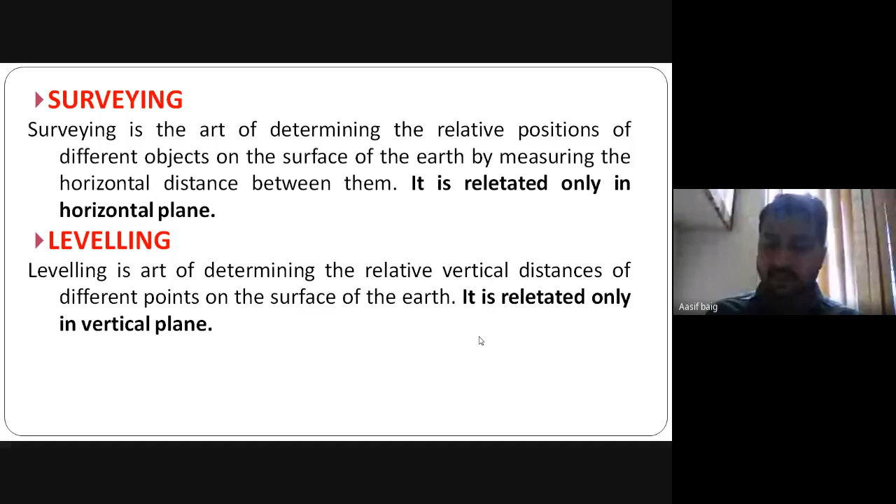Surveying deals with the horizontal plane. In that case, we deal with the determination of horizontal distance only. But in case of leveling, we deal with the vertical plane, in which we determine the relative position in case of height. So these are the definitions of surveying, and another definition is leveling.

So what are the objectives of surveying? The main objective of surveying is to prepare a map or plan to show the relative position of the objects on the surface of the earth, to determine the boundaries of land, and it is very useful for the purpose of designing projects such as dams, canals, roads, railways. The successful completion of any engineering project mainly depends upon accurate surveying.

So surveying is the basic method, or we can say the main branch of civil engineering, which deals directly with all types of structure construction. While going for any road or railway construction, or canal construction, you must have correct alignment, which may lead to an economical project.

While constructing a building, you must go with its boundary line. So for determining the boundary of land, surveying is required. For drawing any type of map or plan, surveying is required. So surveying is the basic thing required in the civil engineering field. This is the main branch of civil engineering.

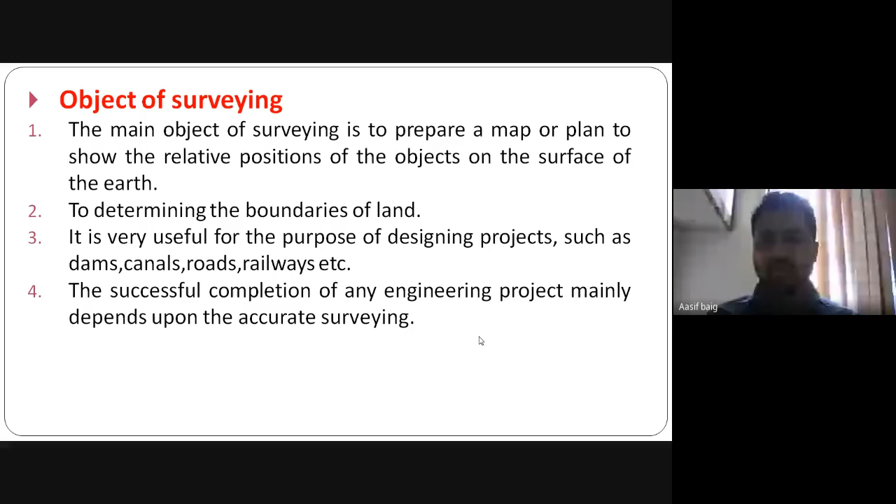Now, what are the uses of surveying? It is useful for measurement of areas, to prepare different types of maps, such as topographical map, cadastral map, engineering map, military map, contour map, geological map, etc. So what are these types of maps? Topographical map is the map which gives the idea regarding the land.

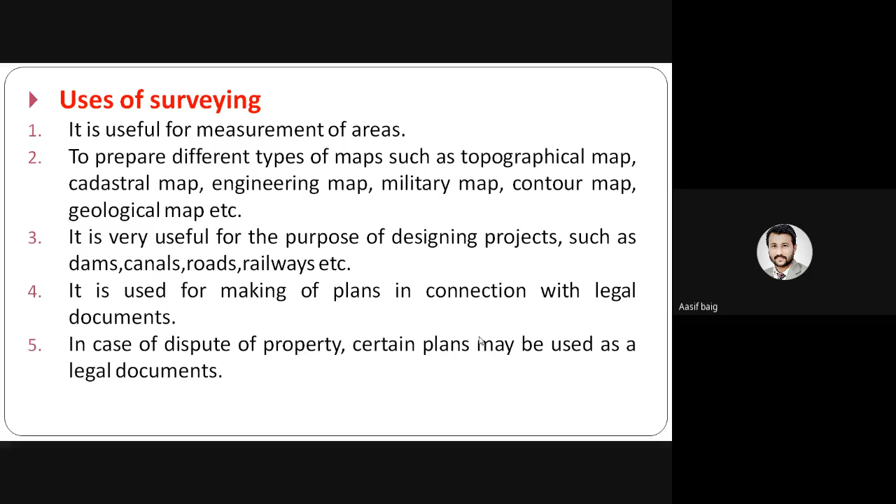Now, depending upon other things, these maps are classified like cadastral, engineering map, military map, contour map, and geological map. It is very useful for the purpose of designing projects such as dams, canals, roads, railway. It is used for making plans in connection with legal documents, and in case of dispute of property, certain plans may be used as a legal document.

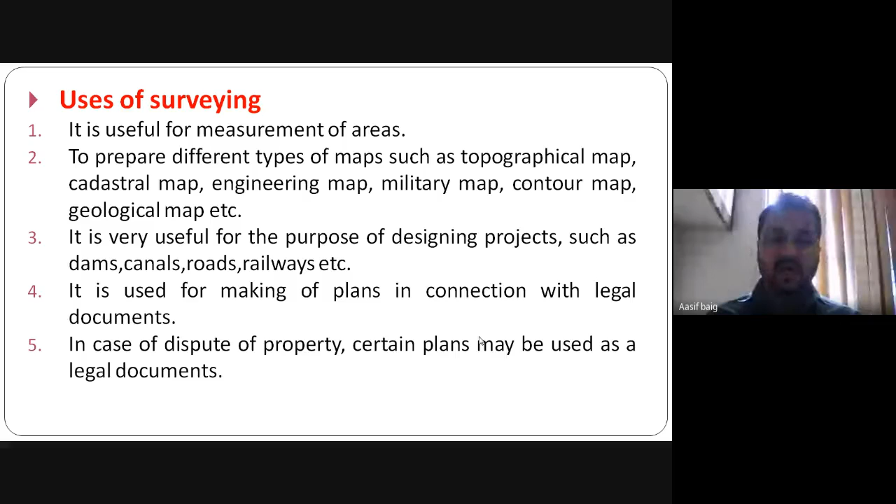So surveying is used in this field. Other than this, many fields are there, as surveying is the main branch of civil engineering. Now, what are the principles of surveying?

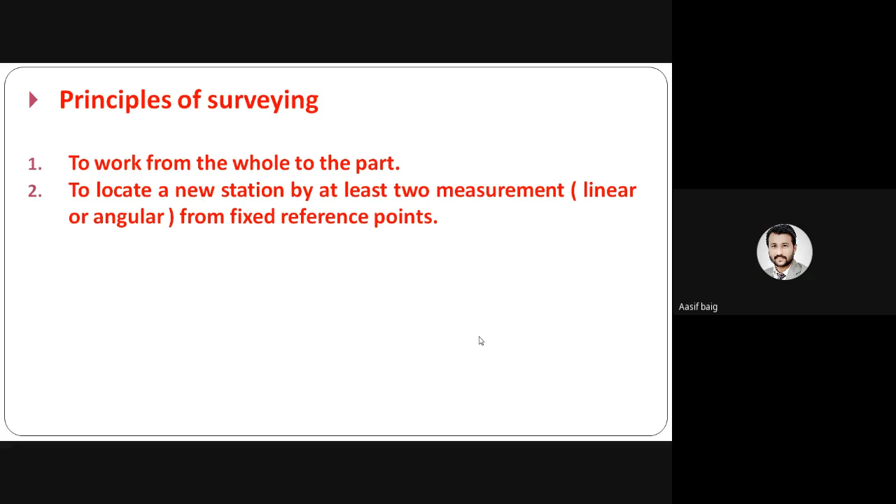There are two main principles of surveying. One is to work from whole to the part, and the other is to locate the new station by at least two measurements, linear or angular, from a fixed reference point. We will see one by one what is meant by work from whole to the part, and to locate the new station by at least two measurements, which may be linear or angular.

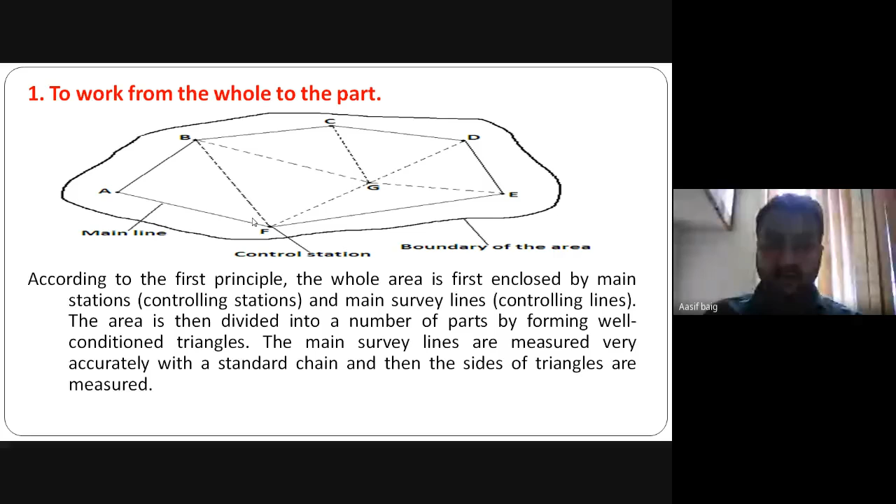Then main survey lines, that is the controlling lines, are the main survey lines. The area is then divided into a number of parts by forming well conditioned triangles. The main survey lines are measured very accurately with a standard chain, and then the sides of the triangle are measured. So the whole area is divided into main station lines, then divided into well conditioned triangles, and these lines are measured with the help of a chain. This is the first principle of surveying.

Another point on the same topic: the purpose of this process is to prevent accumulation of error. During this procedure, if there is any error in the measurement of any side of a triangle, it will not affect the whole work. The error can always be detected and eliminated. But if the reverse process, from the part to the whole, is followed, then the minor error in measurement will be magnified in the process of expansion, and this error will become absolutely uncontrollable.

So the purpose of this first principle is to avoid accumulation of error. While measuring any area or boundary, we have to divide the whole area into parts, and measure each individual part. So if there is any error in any part, the whole work will not be affected by that error. We can account for that error afterwards.

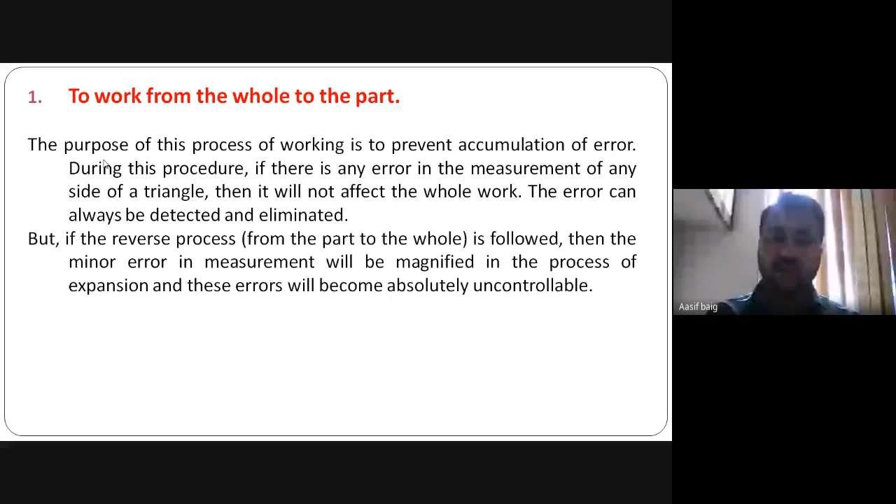Now the second principle is to locate a new station by at least two measurements, which may be linear or angular, from a fixed or reference point. According to this second principle, the new station should always be fixed by at least two measurements from a fixed reference point. Linear measurement refers to horizontal distance measurement by chain or tape. Angular measurement refers to a magnetic bearing or horizontal angle taken by the prismatic compass or the theodolite.

So these are the equipment used to determine angle and distance. For distance we can use a chain or tape, and for angular measurement we can use the prismatic compass or the theodolite.

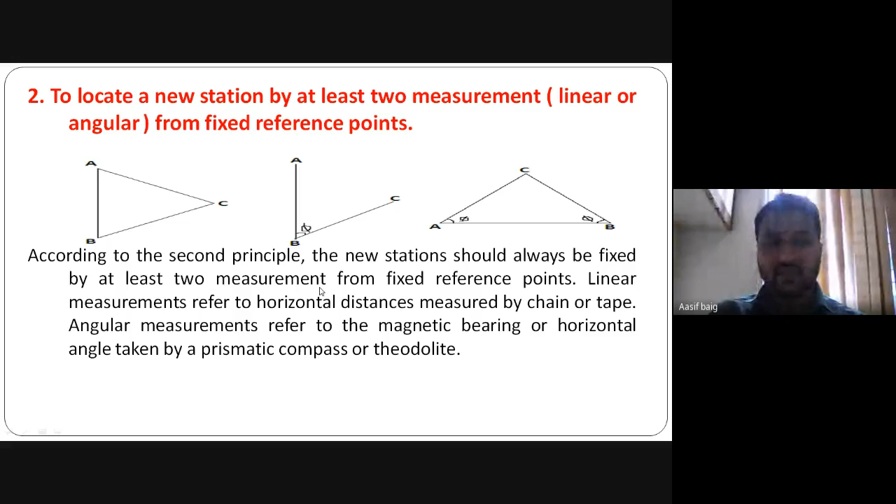So at least two measurements we should know: the length between particular stations, and the angle. It may be either linear or angular. In the first diagram, this is purely linear. In the second diagram, it is one linear and one angular. In the third, both are angular.

Now the classification of surveying. The first is primary survey, and the second is secondary survey. Surveying is classified into two: primary and secondary. Primary survey has two types: plane surveying and geodetic survey. In plane surveying, we are not considering the spherical shape or curvature of the earth.

But in geodetic surveying, we are considering the curvature of the earth, as we know the earth has a spherical shape, so this survey is called geodetic survey. The second classification of surveying is the secondary classification, which is further classified based on its uses.

Based on the instrument used, surveying is classified as chain surveying, compass surveying, plane table surveying, theodolite surveying, tacheometric surveying, and photographic surveying. If you are using the chain, it is chain surveying. If you are using the compass, it is compass surveying. If you are using the plane table, it is plane table surveying. If you are using the theodolite, it is theodolite surveying.

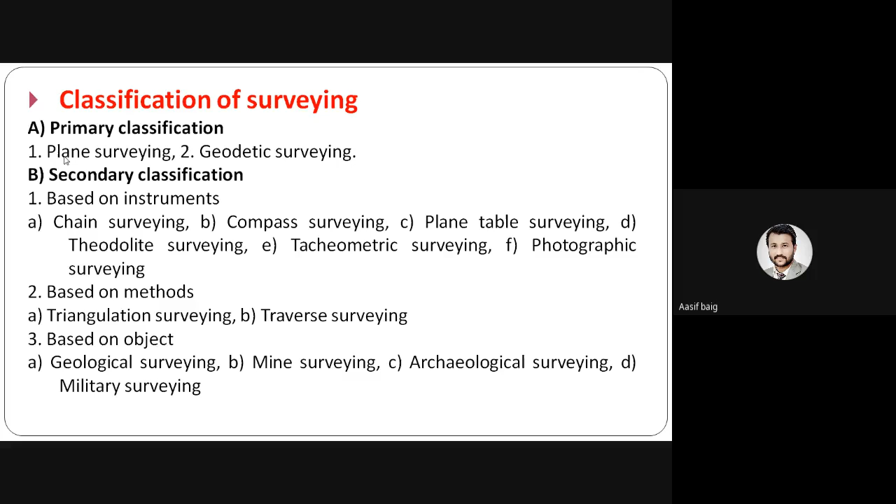Now based on the method, this is classified into two: triangulation surveying and traversing. What is meant by triangulation and traversing, we will see in the next class. But on the basis of this method, surveying is classified.

Now based on the object, surveying is classified into geological surveying, mine surveying, archaeological surveying, and military surveying.

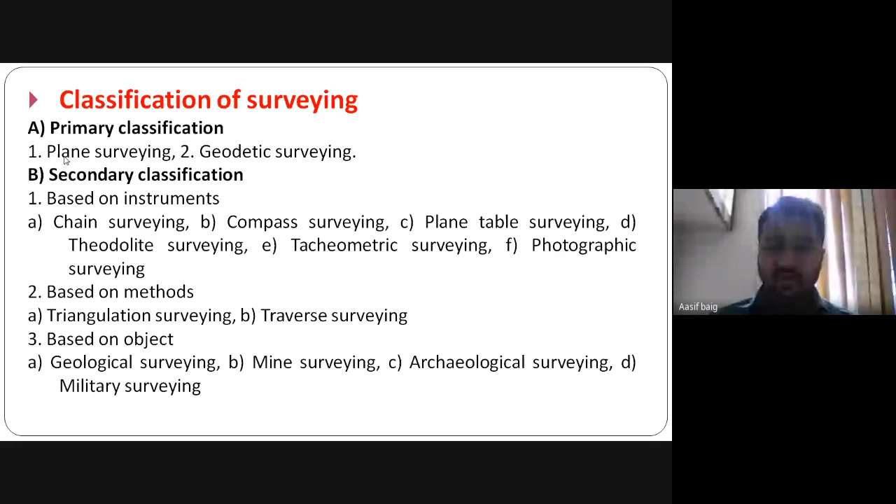Now again, based on the nature of the field: land surveying, marine surveying, and astronomical surveying. If the survey is performed on land, it is land surveying. If the survey is performed on water, this is marine surveying. If we are talking about the stars, this is astronomical surveying.

Land surveying is divided into the following classes: topographical surveying, cadastral surveying, city surveying, and engineering surveying. What is meant by topographical surveying? To determine the natural and artificial features of the country, such as rivers, lakes, hills, roads, railways, towns, etc. This is called topographical survey.

Cadastral survey is to determine the boundaries of the field, estates, and houses. The city surveying is to locate the premises, street, water supply, and sanitary system. Engineering survey is to collect data for designing engineering works such as roads, reservoirs, railways, etc.

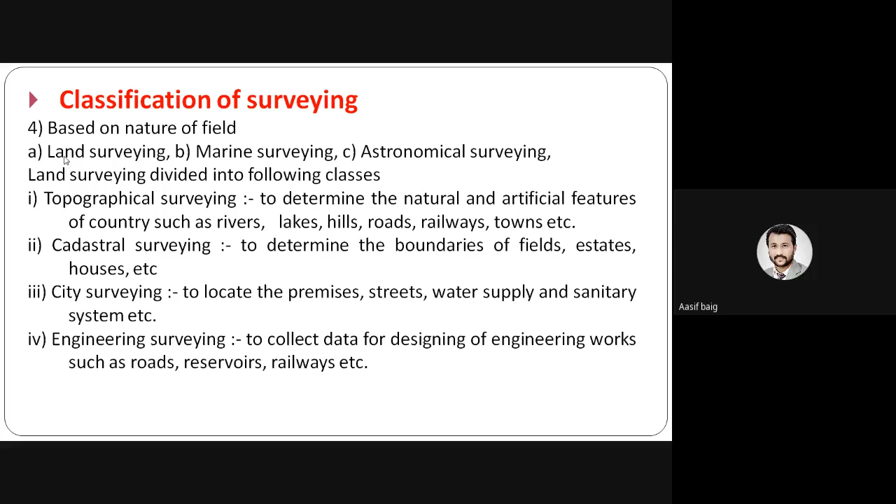Now, these are the differences between plane and geodetic survey. The effect of curvature of the earth is not considered in plane surveying, but in geodetic survey we have to consider the curvature of earth. The surface of the earth is taken as plane in case of plane survey. In geodetic survey, it involves spherical trigonometry, so it is called trigonometrical survey.

In plane surveying, the area to be surveyed is less than 250 kilometers square. So there is one limitation for plane surveying; we cannot go for more than 250 kilometers square area. But in geodetic survey, if you're surveying for more than 250 kilometers square, we have to consider the curvature of earth. The degree of accuracy is very low in plane surveying.

In geodetic surveying, accuracy is very high. The plane surveying is conducted by state agencies like Irrigation Department, Railway Department. Geodetic survey is conducted by the Survey of India, GTS department.

Now you can see in the figure below, the straight line is drawn in plane surveying. The undulation is drawn in geodetic survey. So curvature of earth is considered in geodetic survey.

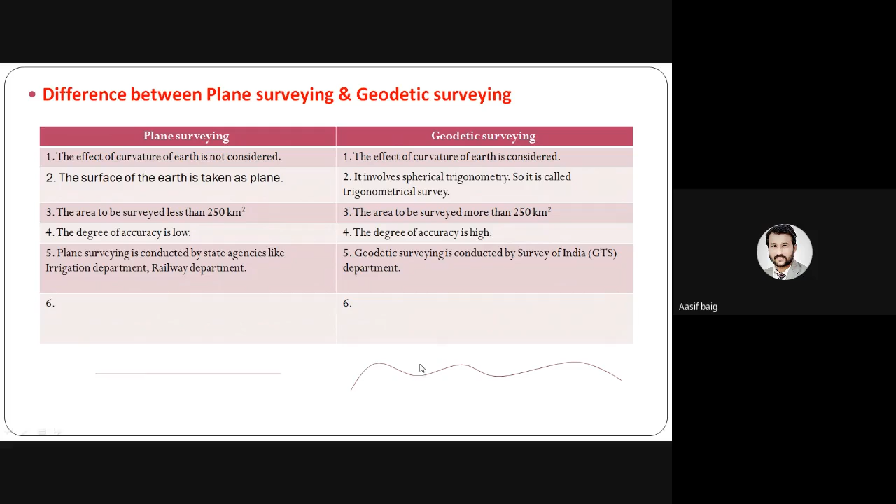Now, what is meant by representative fraction? It is the ratio of plan distance to the corresponding ground distance. Representative fraction is the ratio of plan distance, that is plane distance, to the corresponding ground distance.

In RF, both the numerator and the denominator should be in the same unit. If 10 meters on the ground represents 1 centimeter on the drawing paper, the scale is 1 centimeter equals 10 meters. So RF equals 1 centimeter divided by 10 into 100, which is 1 by 1000.

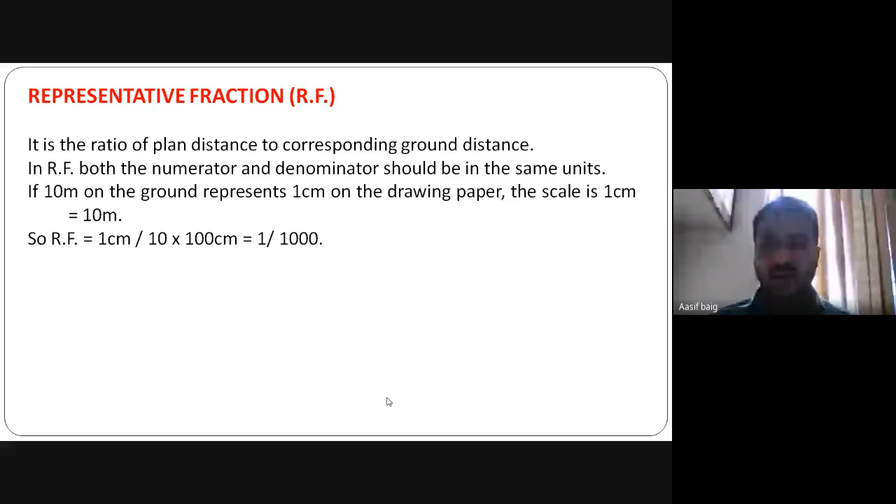This symbol is for the building. This symbol is for the temple or orchard. Cultivated land symbol is this one. This symbol is for the compound wall. This symbol is for the embankment filling.

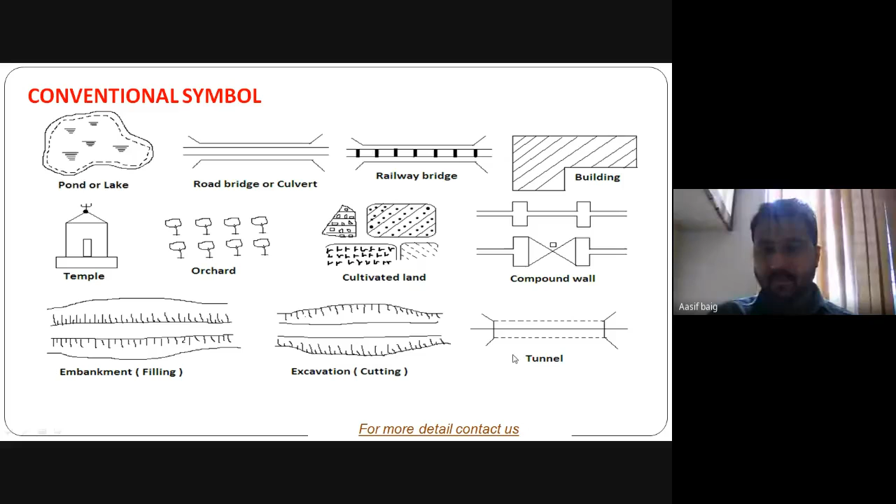This symbol is for the excavation cutting. This symbol is for the tunnel. So many more symbols are there.

So we will see the linear measurement. Linear measurement is one of the basic functions in survey. Always horizontal, not sloping distance, and there is no way to check the error other than remeasuring.

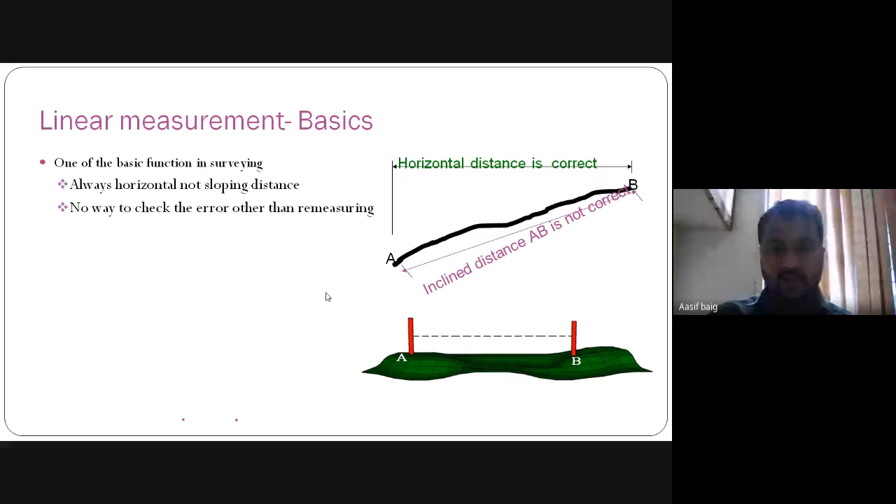So the inclined distance is not correct; horizontal distance is correct. If there is a slope and we are calculating the inclined distance, this is not correct. So from station A to B, if you are measuring the horizontal distance like this, this is the correct one.

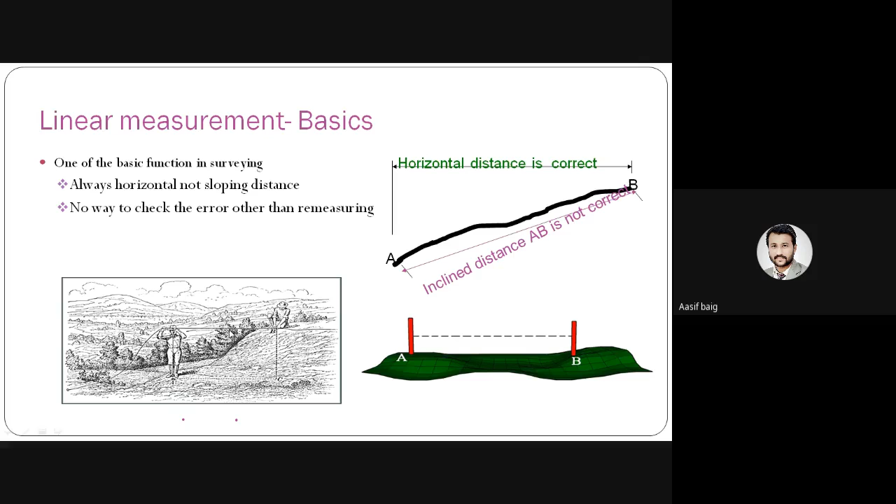So how we have to measure? You can see in the figure itself. So B point is there, and this is the A point. Okay, two men are there. So one person is holding the chain exactly horizontally. Okay, so this line is the correct one. Okay, so this is the horizontal measurement.

So linear measurement methods we will see. So there are methods of linear measurement: direct measurement, by optical means and electronic method. So from the figure of this instrument, you can see direct measurement by meter or by passometer or by tape or chain or by any digital meter. You can calculate the direct measurement.

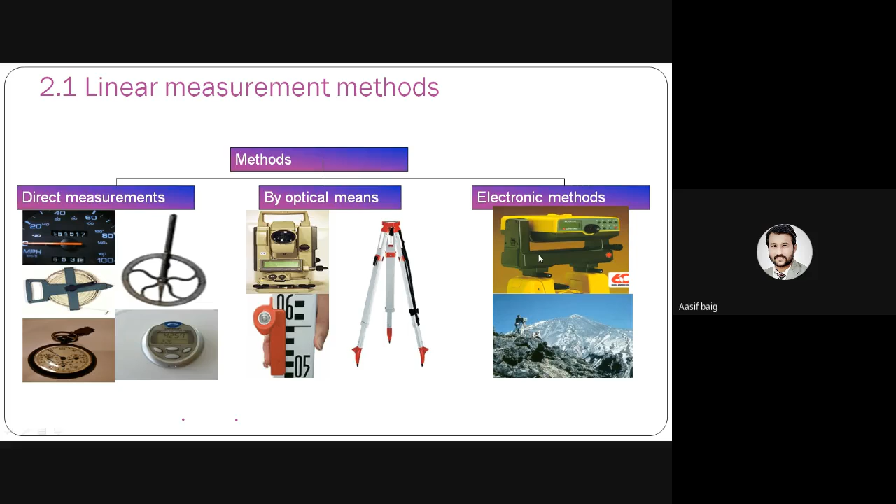By optical means, by using this total station, you can measure the distance. Okay, by electronic method. Okay, this is the instrument for measuring the distance. Okay, so this is called as the electronic distance meter. Okay, EDM. Now direct measurement instruments such as pacing, passometer, pedometer, odometer, or speedometer.

So rough method for preliminary survey, check of large mistakes in the measurement made by the more precise method. Unsuitable in irregular and sloping ground. Precision is 1 by 50 to 1 by 200. Okay. So in direct measurement, if the instrument used is pacing, passometer, pedometer, or odometer, which is also called as the speedometer, this is having some drawbacks.

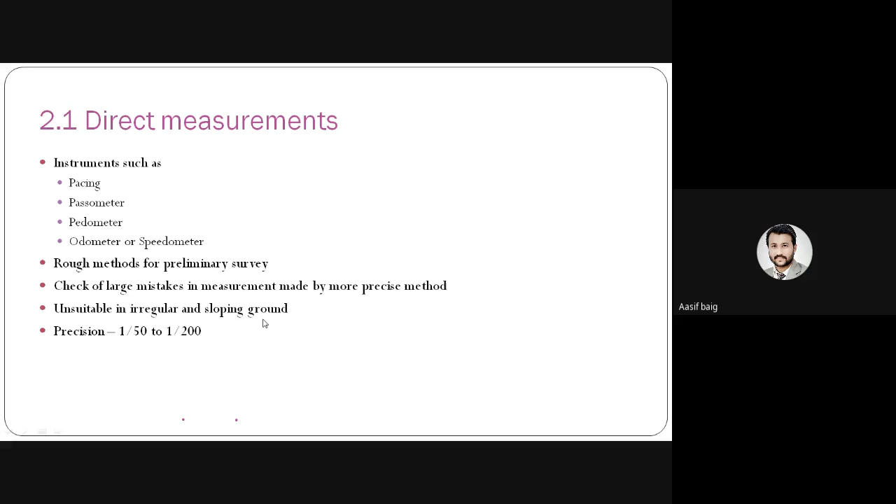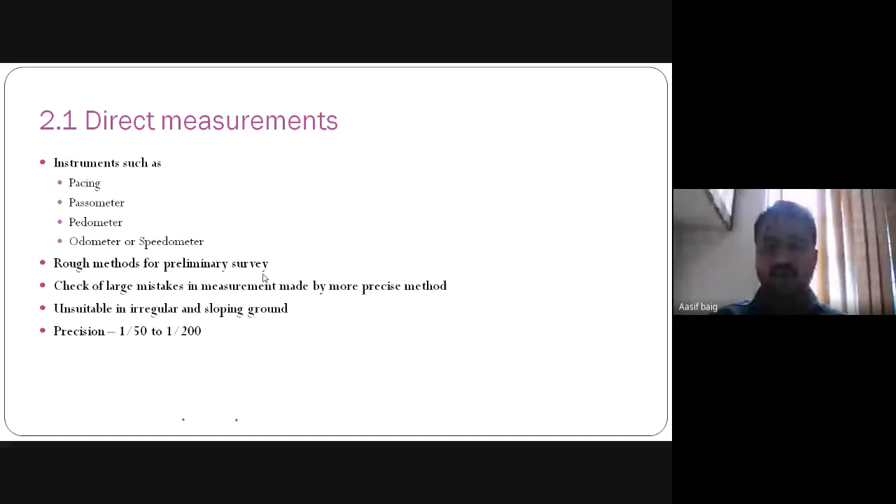This is used for the preliminary survey. This is for the rough. This is a very rough method. So rough survey we can perform by this instrument. Okay. So this is not a much precise method. This is not a much accurate method. So there are chances of error, and the precision of this is 1 by 50 to 1 by 200. Okay. So if you perform a 50 meter or 200-meter length measurement, there may be chances for 1 meter correction.

Okay. Now we will see the instrument like tape or chain, and the survey by using this instrument is called as chain surveying. Okay, so chaining or taping carries the same meaning. Use of either chain or tape for direct surveying, or the chain surveying. One of the accurate methods of direct measurement is the tape or the chain. The method is the basis for most surveying.

The precision of this surveying is 1 by 1000 to 1 by 5000 for ordinary land survey. Okay, so this is much more accurate than the pacing method or the pedometer or the speedometer method. Okay, so chain or tape is one of the accurate methods if you compare with the speedometer. Okay, so generally chain was used early on. Then the steel tape was used, and tape is very common nowadays. Okay.

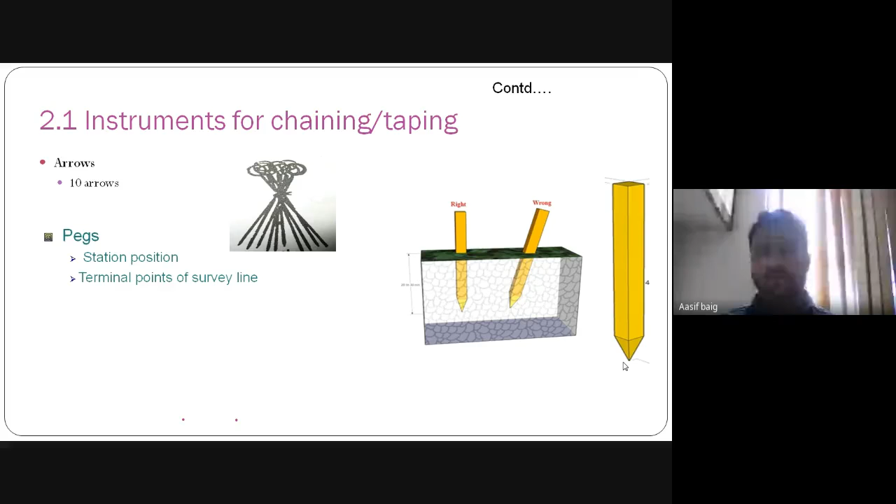Okay. And then we have to range that line by using the ranging rod, keeping the chain in a straight line on the line of that ranging, and at the end of the chain we have to insert the arrow. Okay, so the number of arrows multiplied by the length of a single chain gives you the distance between the stations A and B.

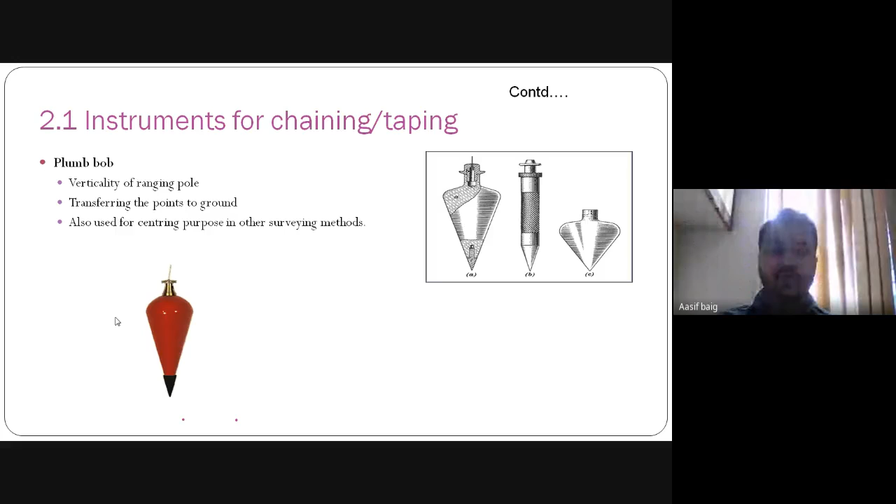Now another instrument is the plumb bob. This is used to check the verticality of the ranging pole and for transferring the point to the ground. Okay. Also it is used for centering purposes in other surveying methods, like if you are using the compass or the theodolite. So for centering purposes, this plumb bob is used. Okay.

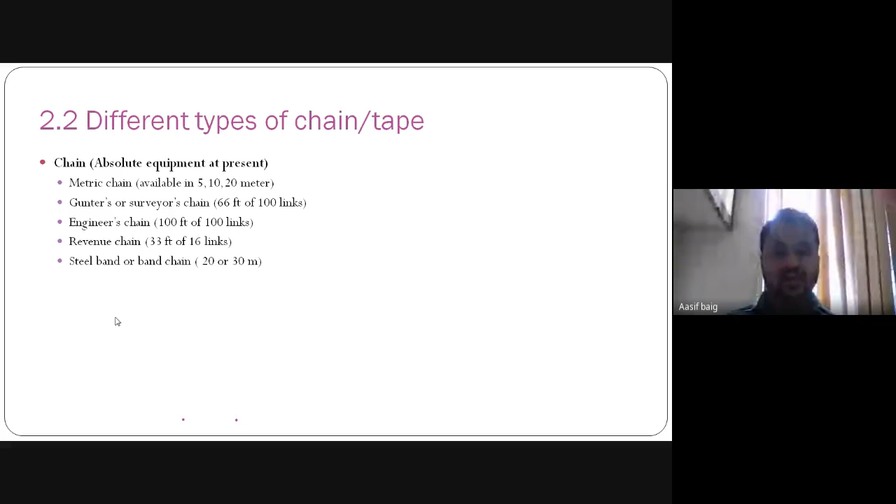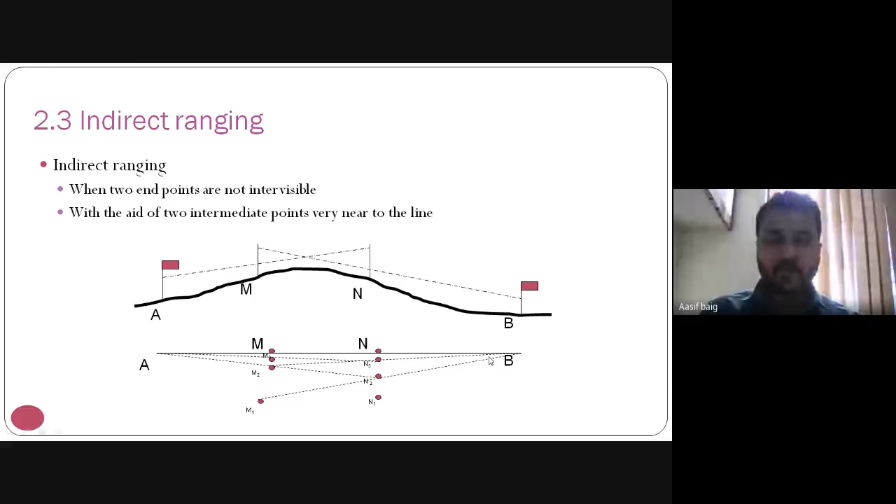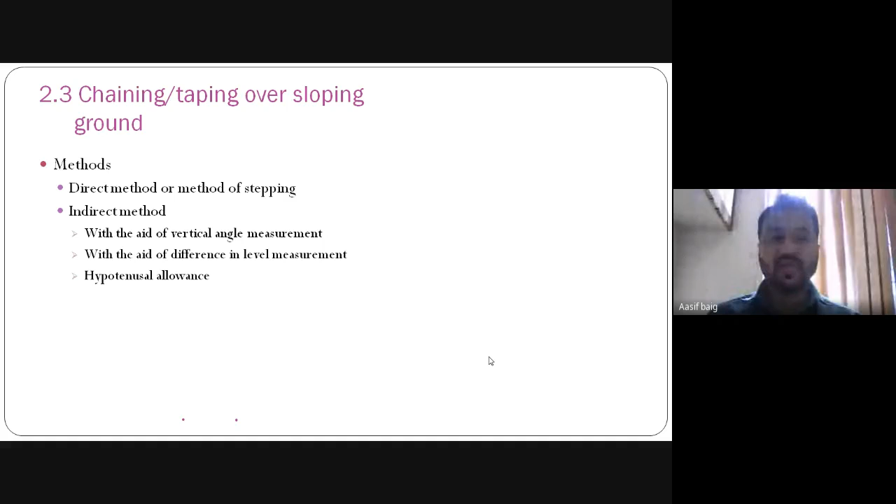Now, chaining or taping over the sloping ground. These are the methods: the direct method, which is also called the method of stepping. Another method is the indirect method. With the help of vertical angle measurement, difference in level measurement, or hypotenusal allowance, we can perform this indirect method.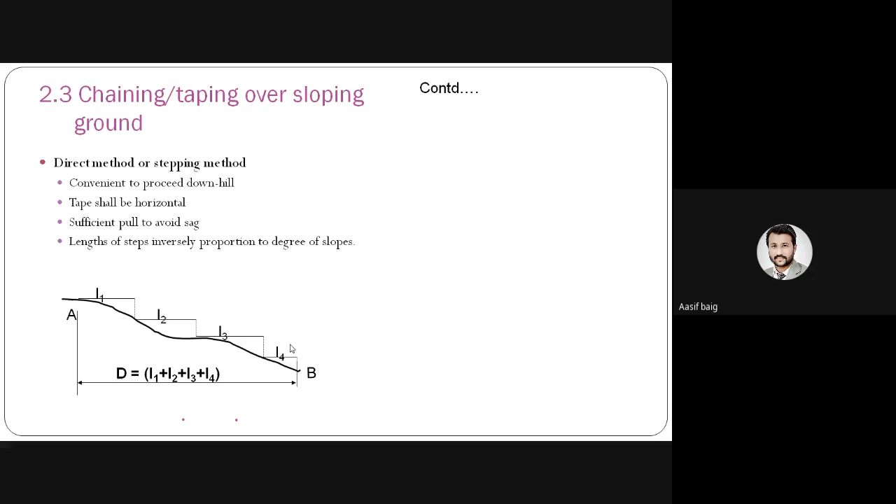Okay, we will drop the plumb bob again. Then from this point we will measure the distance L3. Then we will again drop the plumb bob and measure L4, and we will reach point B. We will add these horizontal distances L1, L2, L3 and L4 to get the total exact horizontal distance between A and B.

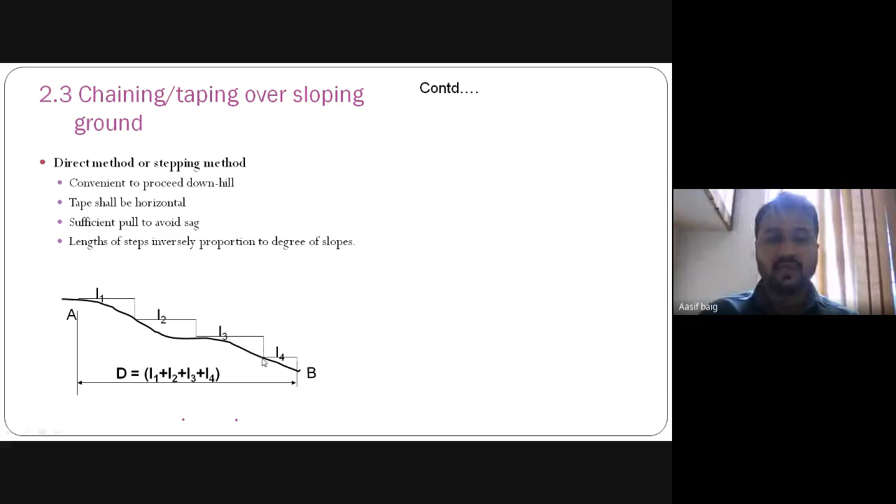And in the figure you can see this looks like steps. That's why this is called the stepping method. This is something we have seen in the first slide as well. Okay.

Now this is the indirect method: vertical angle measurement using a clinometer. A clinometer is the instrument used to measure the vertical angle. By measuring the vertical angle from A to B and B to C, we can determine the distances D1 and D2, and by summing up D1 and D2, we will get the distance from A to C. So by using trigonometric rules and the clinometer, we can determine the horizontal distance.

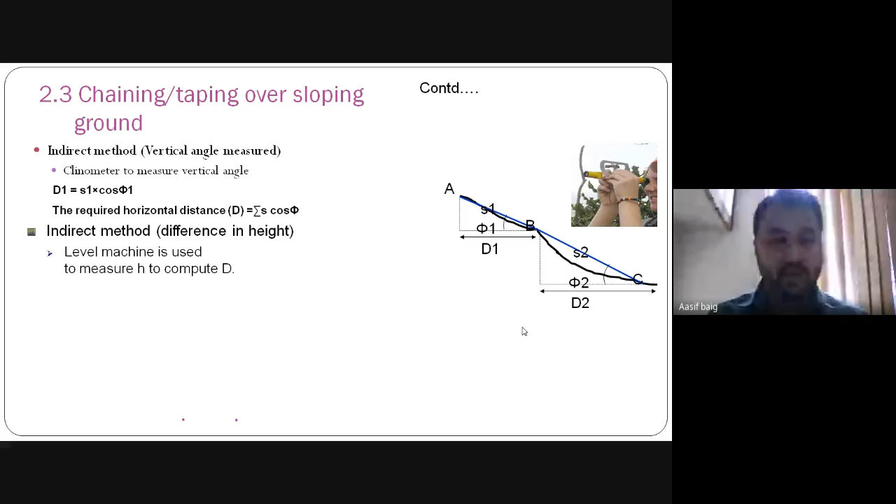Now we will move on to chain surveying. What is meant by chain surveying? What are the principles of surveying? One of the principles of surveying is triangulation. The survey stations are these: A, B, C, D, E. These are the main stations. Now we will connect these with the subsidiary stations, and we will divide this whole area into a number of triangles.

Survey stations and survey lines: stations should be mutually visible. Survey lines should be as few as possible. There must be one baseline passing through level ground. Form well-conditioned triangles and sufficient check lines. So this is about survey stations and survey lines.

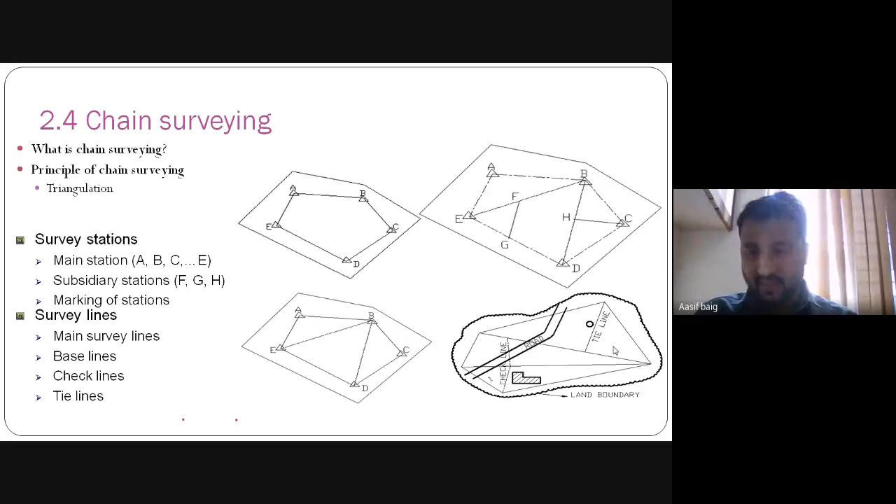Now, what is an offset? In the figure you can see this. To mark any landmark in the plan, one line is passing near it. This is the check line in the figure, and this is the offset line you can see. So it is used to mark any landmark.

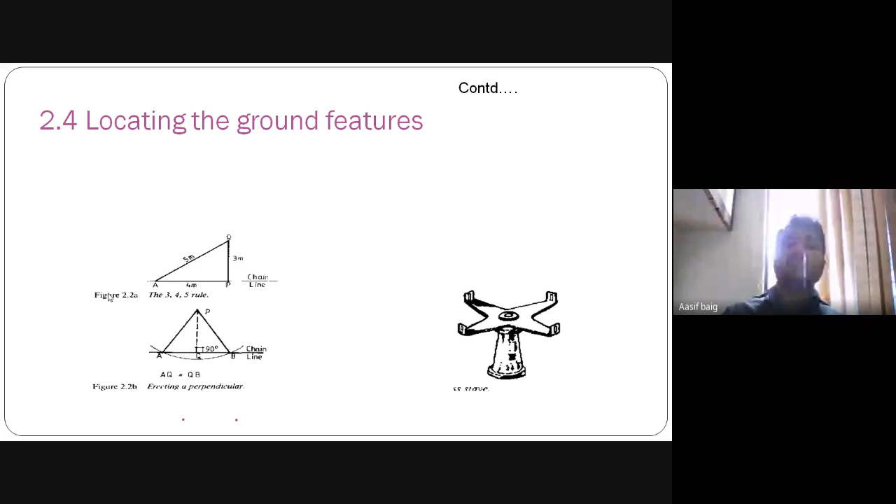Offsets are of two types: perpendicular offset and oblique offset. A perpendicular offset has an angle of 90°, and an oblique offset has an angle other than 90°. For making the offset, we have this instrument.

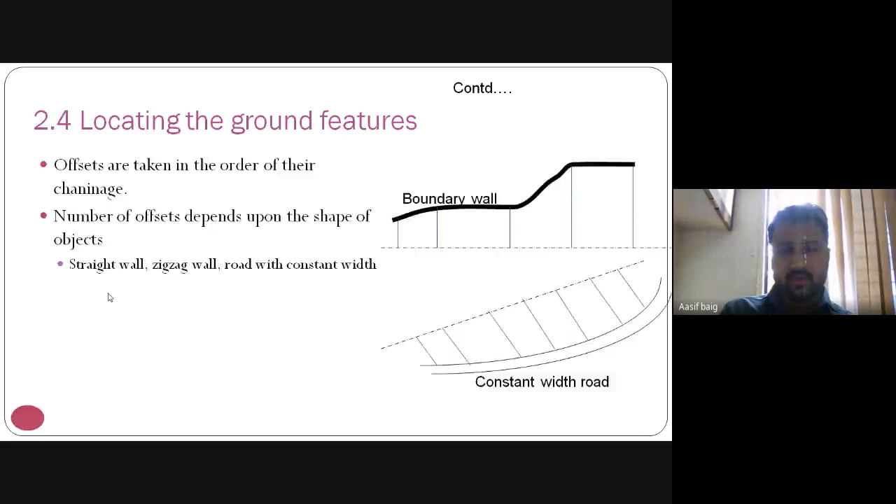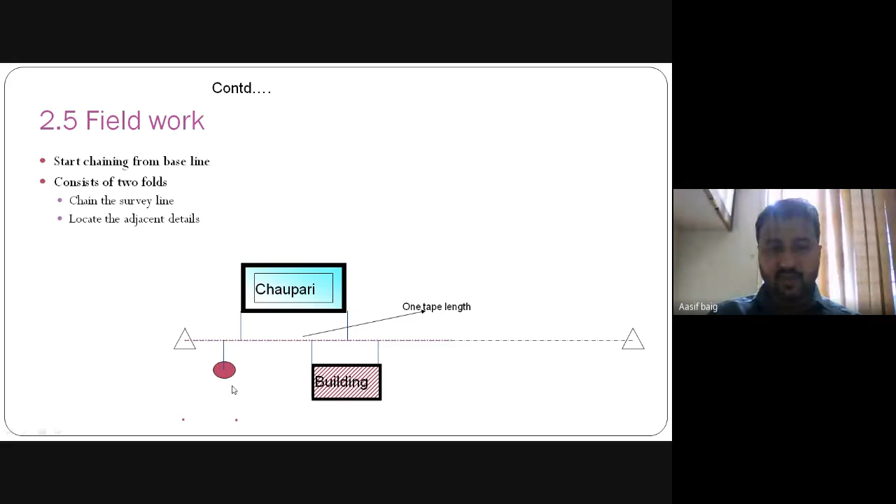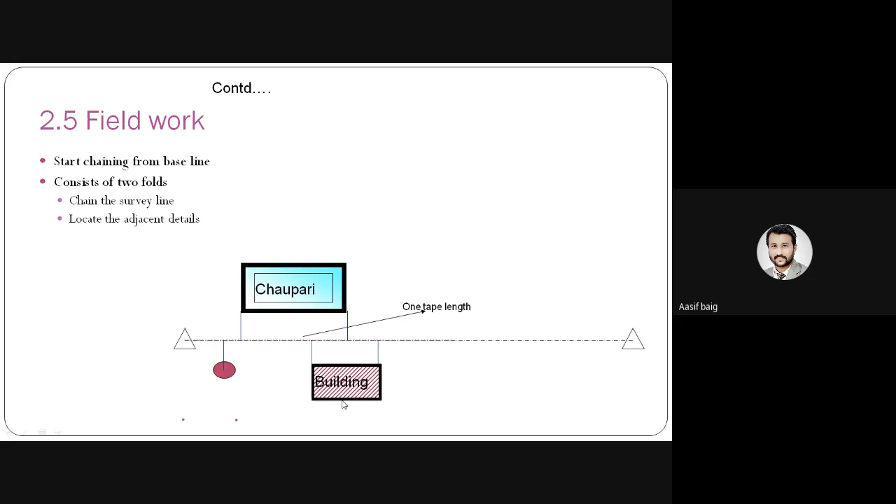At this point, suppose we have to mark a ground feature like a building. For the building, from line AB, we make 90° offsets to two corners of the building, and we draw this box with hatch lines. This is the symbol of a building. So this is the field work.